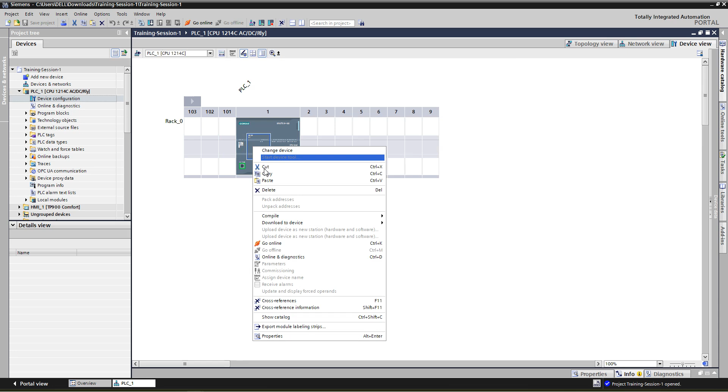So what we can do is we can remove this and then we can add another communication board CB, which is here, I believe, yes, communication board. You can see point to point and CB1241. They might have different part numbers depending on the versions, or only one part number if they don't have any updated version over there. So I'll drag it on top of the PLC.

That's it, nothing more. But just to get an insight, let's click on that CB board. Now you can see general information on that CB. IO link, it means port configuration setting. Here I can see baud rate is 9.6 kbps, parity none, data bits 8 and stop bit 1, which we call in short 8N1. 8 is data bit, N parity none, and 1 stop bit. Now this configuration is fixed here, which we can change using our blocks. So let's keep it whatever it is right now.

Now the important thing is, if you go to the system constant, the name of the CB is local CB1241. So this value is very important because we are going to use the hardware identifier, which is the system constant for this module, 273, in our program. Now for Modbus, we have two types of setting. First setting is to configure the Modbus port number, that means CB board. In that setting, basically we set baud rate, parity, bit number, and number of data bits. So these settings are actually fixed for a single port.

What we change is the ID and the register address for the Modbus devices, but port configuration is kind of fixed for the rest of the process. So that's why we keep this setting in a specialized OB, which will be called once for restarting the CPU. So when the CPU is started, it will be called once, and the configuration for the port will be transferred from CPU to that port only once. So that is called configuration DB. So we call that configuration DB in OB100. OB100 is specified for startup OB.

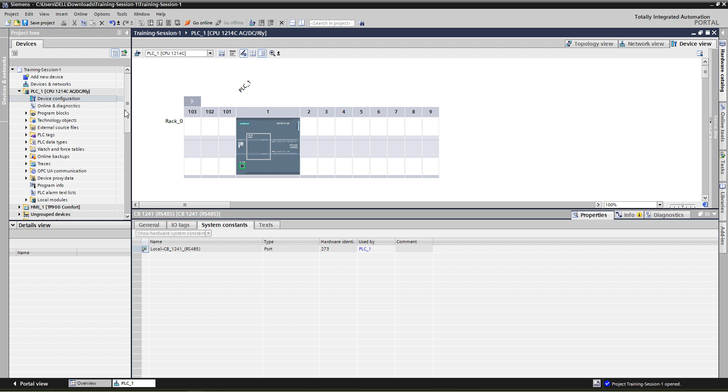So during startup it will be called only once, and after that we have to use the other Modbus block for other configuration, and this will be changed as per our requirement on the go. So that will be used in another block which will be called periodically in the program. So let's get to that thing. So what we have is main OB. This is the different program. So I have to add one new block. That block will be startup or restart OB. You can see in the OB, startup OB, which will be OB100. Actually this OB100 is universal for S7-1200, 300, 400 or other series of PLCs.

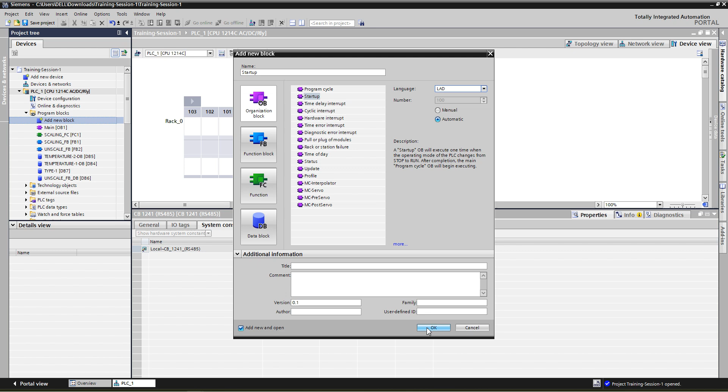Now we have to change the language to ladder, because this is the language we know right now for this training purpose. So let's make it OB100 startup OB and then create it. Now as the OB is created, we have to configure the port configuration block in this OB and transfer it when the CPU restarts. Now if you go to the instructions, you will find that there are different types of instruction sets: basic, extended, and then you have communication. So we are interested in communication block. In the communication you can see there are different blocks. S7 communication, you can find get, put.

This S7 communication is between two CPUs or between two S7 devices. So let's forget it right now. We'll go for communication processor. Then you will see that in the communication processor we have two options: Modbus RTU and Modbus, that is version 2.2. Now keep in mind that we are going to use this type of Modbus. If you click on this specified block, you will see this block, and this block is specially used for different firmware version, and this block is used for lower firmware version.

But if you use MB_COMM_LOAD, this one, the version 2.1, I think that is upgrade capable. So if you use it, then the rest of the CPUs can use it too. But if you use the updated version, then there is a possibility that lower firmware version CPUs cannot use them. So let's get back to our version 2.1. So this is the main communication module to transfer the port configuration to the CB board. So we'll drag it here, and then we have to create an instance DB for this one. So let's make it MB communication load DB1. Now if you have more than one communication processor, as you are using one CB board, you cannot use another CB.

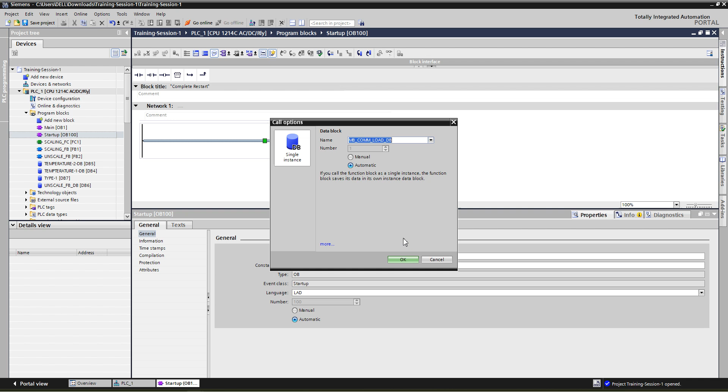So what we have to use is the CM or CB, all together. For each CM or CB, you have to drag and drop this block and define a specified DB number for this block, and do not mix the DB numbers between the blocks. Okay, so we have to be very precise about that.

So let's make it the first one for our communication board. As we can use only one communication board, we don't have to use load DB 1, 2, 3, 4. But if you're using CM, I think you can use 2 or 3 CMs. If you're using 3 CMs, then you have to use different DB numbers, like MB load DB underscore 1, DB underscore 2 and DB underscore 3 for the rest of the CMs.

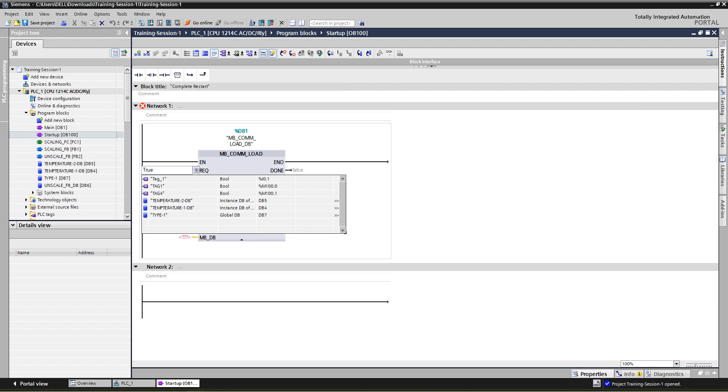Now we are back in here. Now what we have to do is request. When you make the request bool type of data true, then at that instance all the information that you have provided in this block will be transferred to that CM or CB. This request will be run once, because this whole block will be running once when the CPU restarts. So we can make it just true. So it will be requesting when the block is called.

Now the port number is the port number for the CB. You remember the hardware identification number or system constant. You will find that this is the port number. This is exactly the same port number we will be using here, because we get the port number from that CB board. If you click on the CB, you will find system constant, general, and

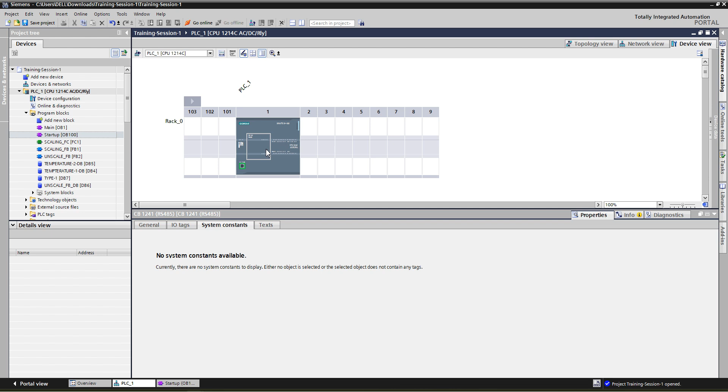now each time you call a CB or CM, this type of system constant will be automatically created. You don't have to put any number or anything like that. You just have to check the number and then use it as per your requirement. So the port number is defined.

Now we have to define the baud rate. Right now we are using 9600. Depending on the type of blocks you are using, you can define this baud rate as 9600 or as an array like 0, 1, 2, 3, 4. For 0 it might be 9600, for 1 it is 19.2, and so on. For this specified block, they use exactly the baud rate without any array, so I'm using it there. Now the parity is 0, which means none, let's keep it that way.

Now this block will transfer the whole information from the PLC to that CB board. Now the CB will try to communicate with the other field devices, fetch the data from the device and put it somewhere. That somewhere means you have to connect this Modbus to a specified DB or a specified location where the data fetched from the device will be stored. So when you read the location data, you will find the variable data in there.

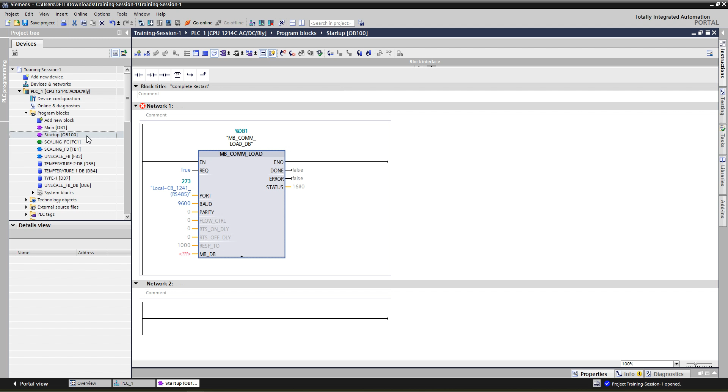Okay, now we don't have any location for this one, so first we have to go to our main program. We have to call a Modbus DB, which is specified for getting information from the registers. So we go to communication processor, Modbus, and then we will use Modbus master, as we are collecting data from the devices in the field. So we are master here. We will be sending requests and the device will oblige.

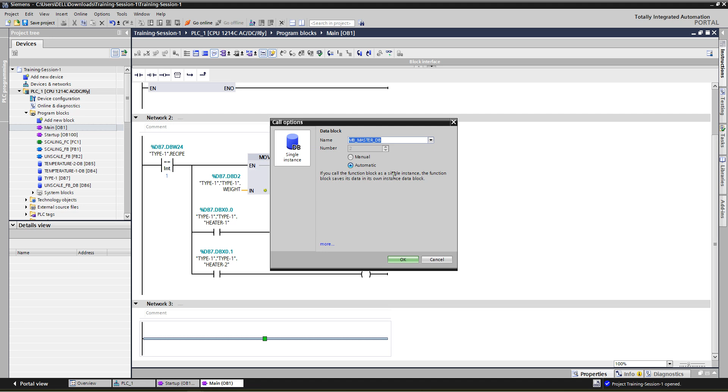Now we'll pick it here, and for Modbus master we will define an instance DB like Modbus master DB. Then we will use a memory bit like a clock bit 1 Hz, so we will be sending a request every second. So let's make it clock 1 Hz, and then the Modbus address, the slave address actually. Let's make it 1 for the slave address, mode 0, and data address 40,000, or you can make it 40001. Data length, we'll take 3 data, and then the pointer address, which is really interesting.

For the pointer address you have to put an address like a pointer. For this operation we'll just use 3, as we are getting 3 data from the field. What we can do is use MB data 40,001, MB data 40,002, and MB data 40,003. So these are the data we will be looking for. So we are collecting data from 3 registers in the field, and those 3 registers' data will be saved in this location.

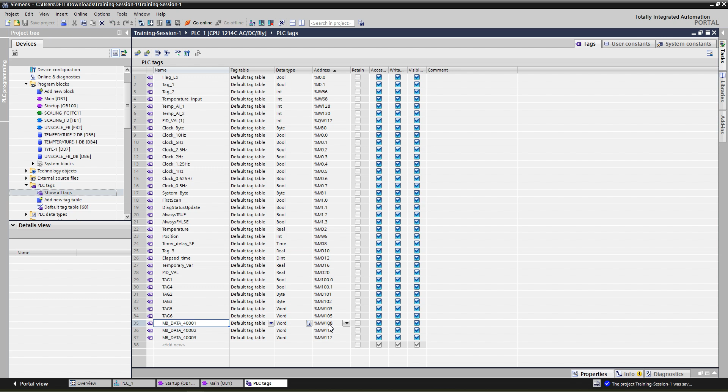The pointer starting should be MW108. To write the pointer address, we have to write it in a different way. For a pointer in Siemens, you write P# and then M108.0 BYTE 6. So that means from the single bit address M108.0, we are hoping to get data for the next 6 bytes, which is 3 word data, that means 3 integer data. So that is the configuration we have right now.

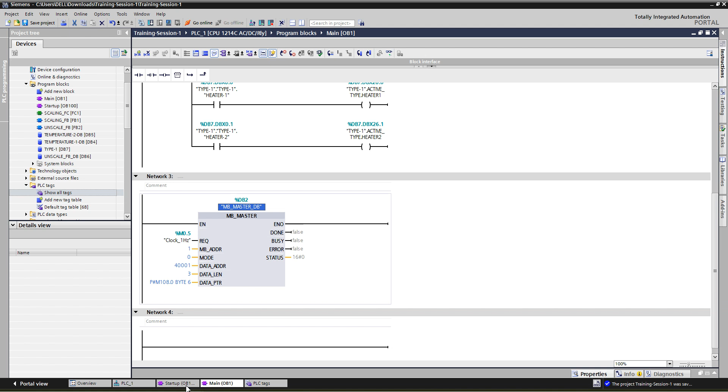This MB master DB is important because we are collecting data from the CB board and saving the data in this data block. So we have to put this data block in the specified CB. Here you have to use that data block, like Modbus master DB. That's it, no dot, nothing. So that's the configuration we are looking for. After this configuration, our program is ready. We have to download the program to the PLC, and start it again. That way you can collect data from the field.